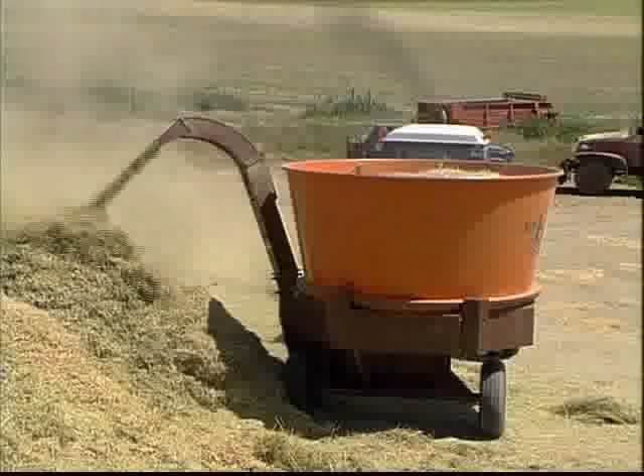We all know that wasted feed means higher cost and lower profit, a situation that's tough to take in today's highly competitive business environment. So work smarter, not harder, and eliminate feed waste with a RotoGrind tub grinder from Burrows Enterprises. RotoGrind tub grinders are the most versatile on the market, yet they are less expensive and easier to use than the grinders out there for your consideration.

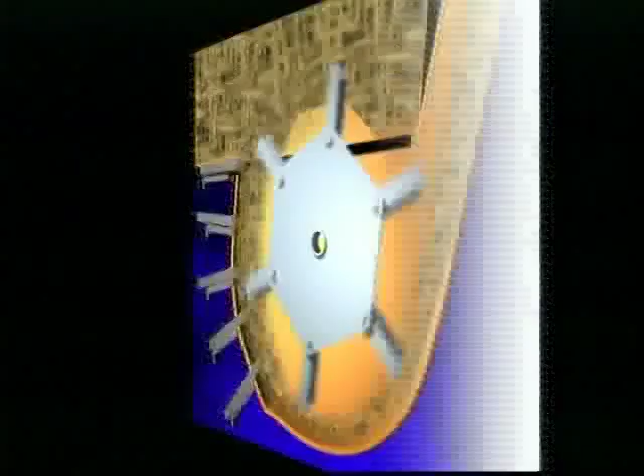RotoGrind's unique state-of-the-art grinding technology means that very few moving parts are required. In fact, the RotoGrind has no belt, no chain, and no gearbox drives to wear out and replace. The rotor cuts across the tub floor from the outside to the center.

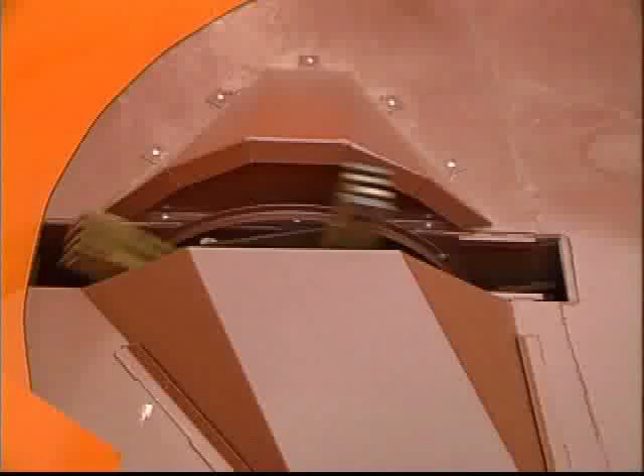In comparison with the competition, RotoGrind's hammer mill is actually 3 to 5 times heavier per inch of shear length. This superior weighting creates the inertia that makes RotoGrind not only the smoothest running grinder on the market, but also the easiest on tractor power takeoffs. In short, fewer moving parts means less upkeep and less downtime, not to mention a much lower purchase price.

Equally impressive features of the RotoGrind are its low horsepower requirement and its ease of operation. These features translate into surprising capacity. With only 80 to 120 horsepower, 10 to 20 tons per hour can be expected under normal conditions.

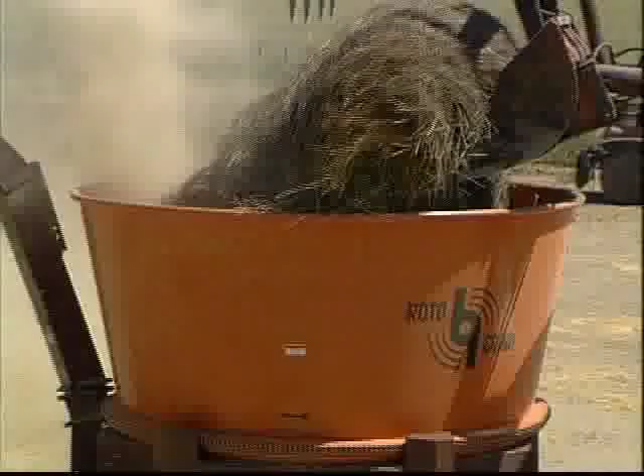The RotoGrind is a durable, versatile grinder that handles all types of forage, as well as ear corn, shelled corn, and small grains. And when Mother Nature puts extra moisture on your forage, RotoGrind enables you to blend inexpensive, lower quality forage into your feeding ration. A smart way to use feeds that would otherwise be thrown away or used for bedding.

Indeed, research stations and university tests have shown that grinding your forage reduces feed waste up to 50%. In addition, feeder cattle can gain up to 1 pound per head per day more when they are fed ground forage instead of unground forage.

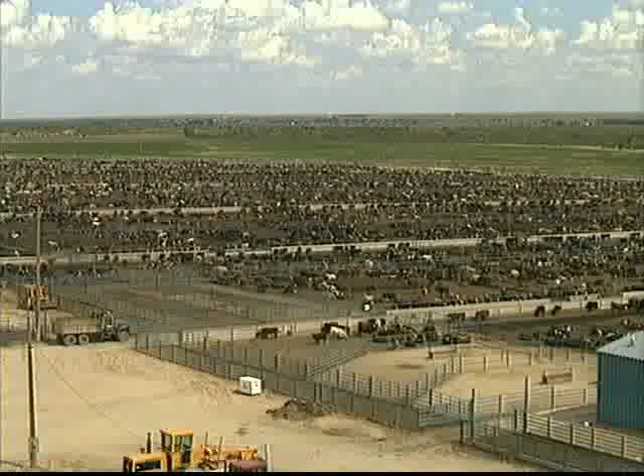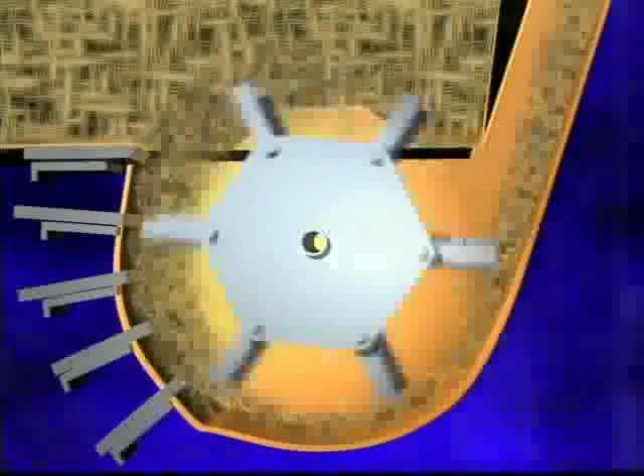Basically a roughage grinder, the RotoGrind handles large round or square bales and loose hay. Unlike less efficient competitors that use screens, the RotoGrind relies on individually adjustable shear plates to control particle size. This exceptional feature easily makes RotoGrind the grinder of choice in tough, wet conditions. These shear plates are controlled from ground level and can be adjusted with ease and speed.

Even debris like leaves and branches or paper and wood chips are no problem with RotoGrind's versatility and durability. You grind at a time that's convenient for you. In addition, our multi-featured tub eliminates the need to grind large stockpiles in advance, and you never have to wait for the custom grinder to arrive.

Fresh ground forage is more palatable to the livestock, and there is obviously less weather loss when you have the flexibility of RotoGrind at your command.

On the RotoGrind, our long, heavy hammers stay extended, even in tough conditions, and extra weight in the mill and hammers creates the flywheel action that reduces shock loads to your tractor's PTO.

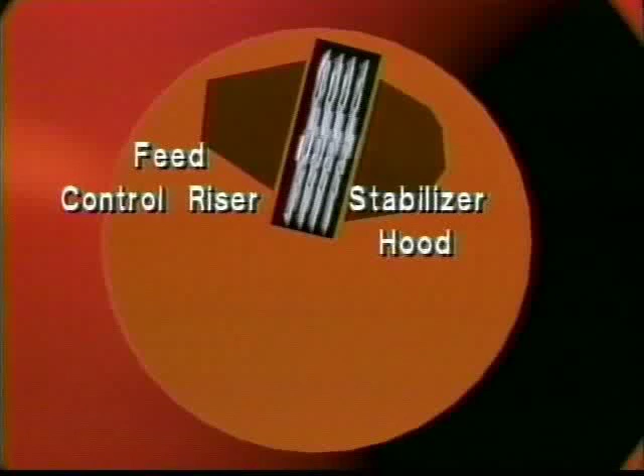The feed control riser determines the depth of bite that the hammers take off the base material, and the stabilizer hood prevents shock loads by ensuring an even rate of feed. Because the hammer mill cuts past the center of the tub, bridging problems are virtually eliminated.

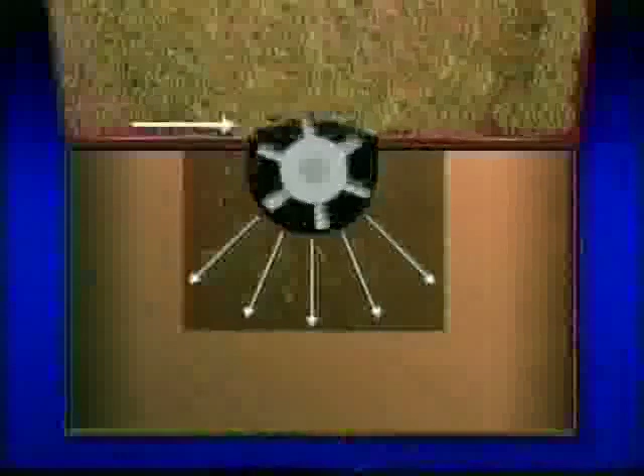Other manufacturers' screen-type grinders commonly use many small and short hammers on a small diameter rotor. In order to reach the tip speed required to grind, they have to increase hammer mill speed to more than 2,000 RPM. This necessary speed is usually generated by a series of belts and sheaves or a gearbox.

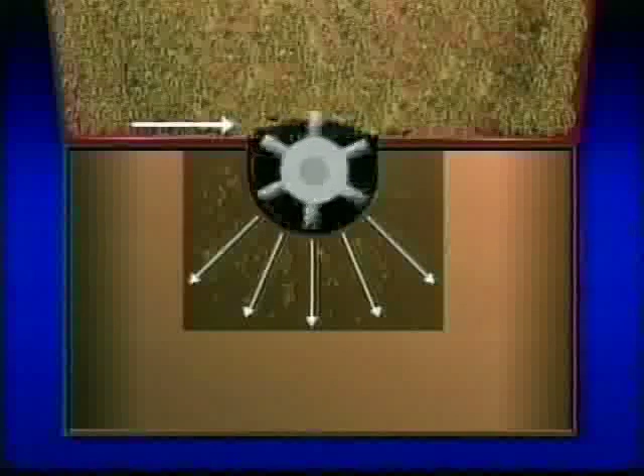To control the size of the grind, these units made by other manufacturers use screens installed next to the hammers. With these machines, material is fed directly into the tips of all the hammers. The amount of bite is uncontrollable and creates severe shock loads to the power source.

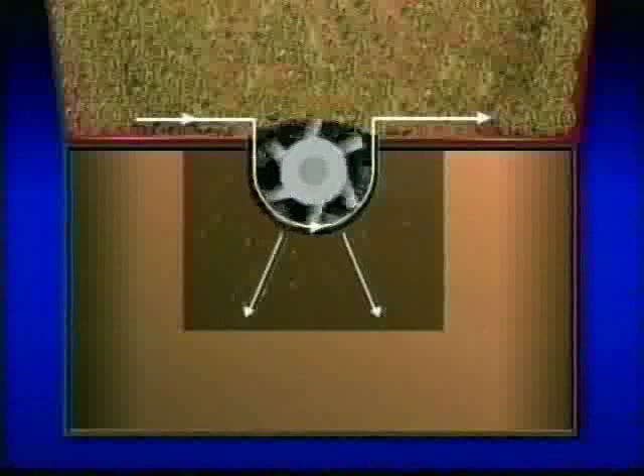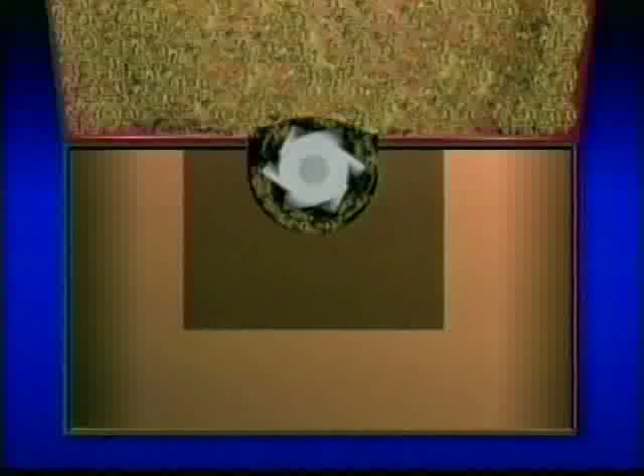When wet material gets in the screen area, it plugs up the screen holes and starts to roll between the mill plates and the screen. It continues to grow in thickness until the rotor locks up solid and imparts tremendous shock to the tractor's PTO components and engine. Some of these competing grinders also have bridging problems because their hammers will not reach the center of the tub floor.

In a particularly important application, grinding dairy quality alfalfa, most grinders hammer the leaves into powder. That's lost protein, drifting away as dust. And stems usually end up being ground too fine because dry alfalfa shatters so easily.

RotoGrind, and RotoGrind alone, can solve this problem by installing heavy-duty alfalfa hammers and driving the machine with the 540 RPM PTO instead of the 1000 RPM PTO that is common. With the slower hammer speed, the grind is coarser and longer. The alfalfa leaves are not powdered, and there is very little dust. Of equal importance, capacity as related to horsepower nearly doubles when grinding speed is reduced from 1000 RPM to 540.

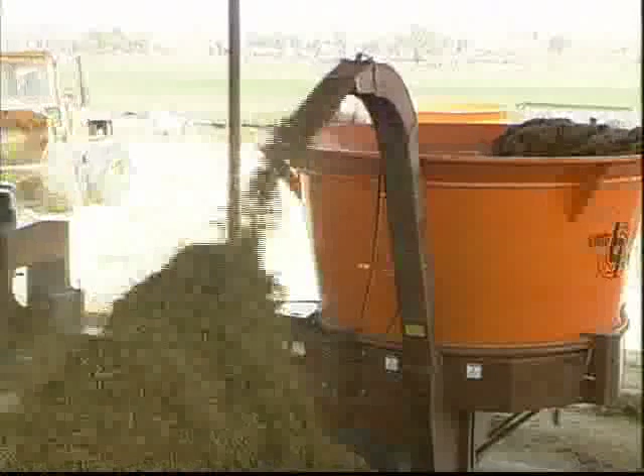The alfalfa hammers also provide an ideal solution for grinding extremely wet and tough materials such as silage bales, wet green waste, compost material, and when spreading bedding.

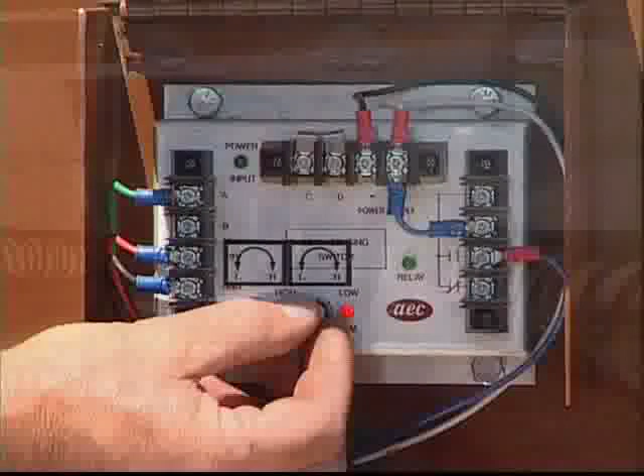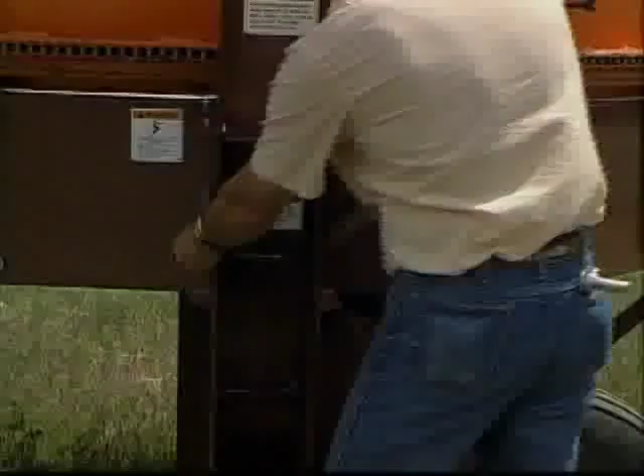A new easily adjustable governor is mounted to the outside of the tub frame for easy access. The new discharge design has a hinged plate that can totally eliminate the problem of plugging the spout with wet materials of up to 75% moisture.

Finally, with our special feed riser adjustments, hammer configurations, and 540 RPM capability, the RotoGrind can easily and quickly be fine-tuned to fit any grinding application.

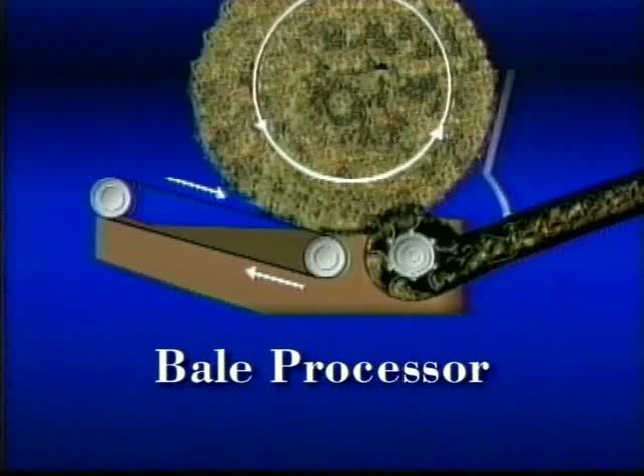Bale processors also fail to generate the tip speed required to do a consistent grinding job on all the materials that may be important to your operation. A bale processor basically does nothing more than what its name says it does. It processes a bale. Its shredding action will not produce a consistent length of material and will not produce a satisfactory grind of coarse roughages or grains.

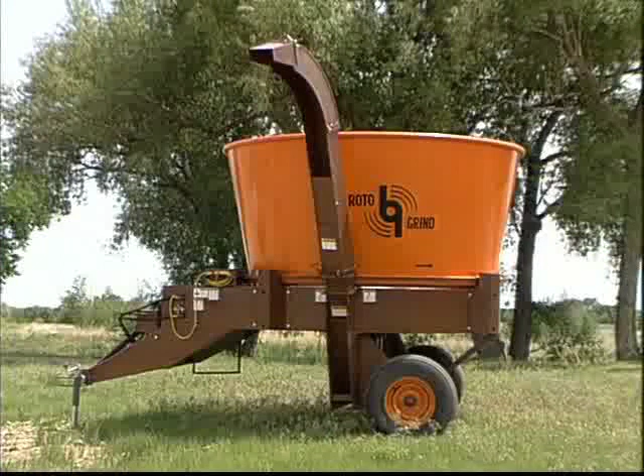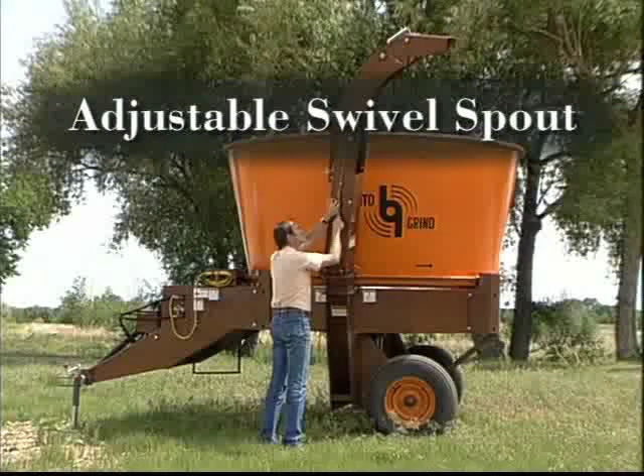So why not go all the way with RotoGrind and get the all-around performance you need to succeed? With your success in mind, RotoGrind offers an array of options that will allow you to meet the special needs of your operation. Optional equipment on the RotoGrind tub grinder includes an adjustable swivel spout, an ear corn shield, an adjustable riser, and a grain hood for small grains.

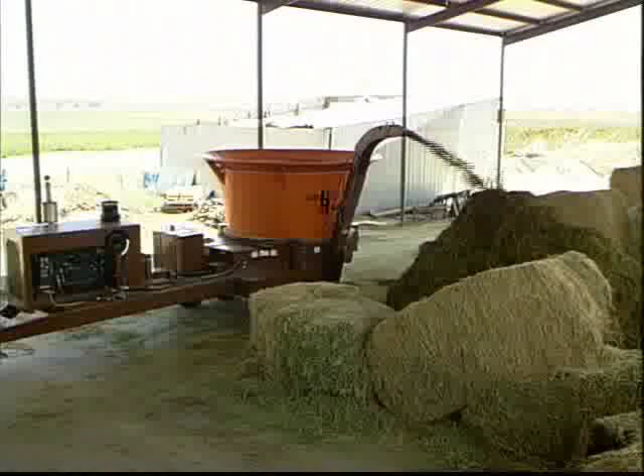RotoGrind units can also be ordered with factory-installed diesel power units or electric motor drives.

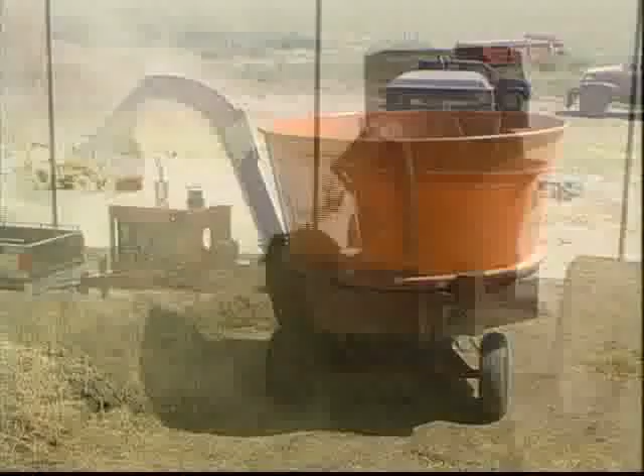In summary, RotoGrind delivers a product designed for the realities of today's agribusiness. Less horsepower, fewer moving parts, smoother operation, and better utilization of feeds. Four very good reasons why you should own a RotoGrind. So arrange for a demonstration now. See for yourself how much money it saves and how well it works in all kinds of conditions. RotoGrind. It's the new, better, and economical concept of grinding.

Burrows Enterprises Incorporated now introduces their latest line of RotoGrind machines. Our new grain grinders have been specially designed to deliver high-capacity output from a low-cost machine.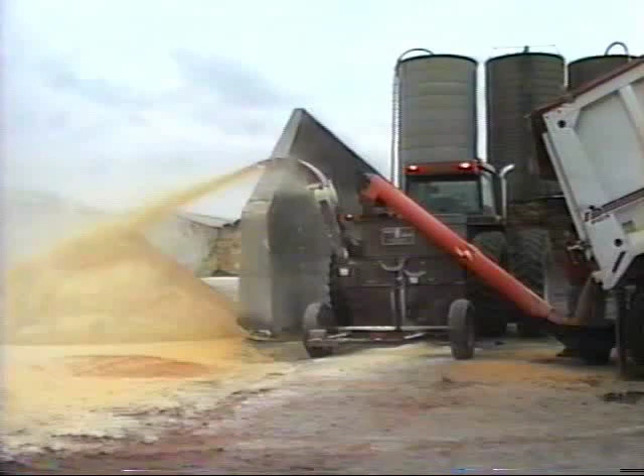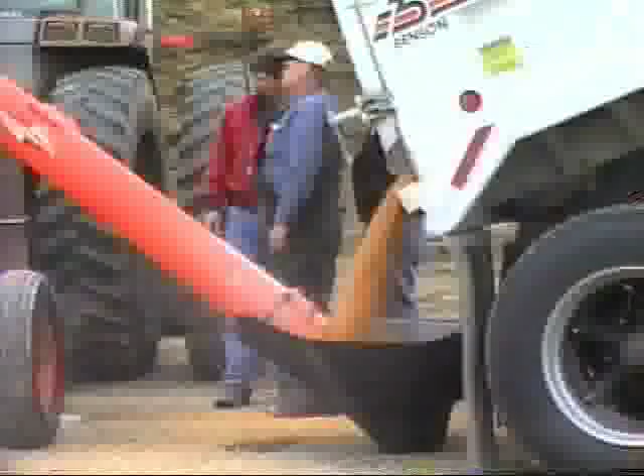Compared to conventional screen-type hammer mills and roller mills, the new RotoGrind grain grinders are much less expensive to purchase, have lower maintenance costs, and offer greater capacity and consistency of product. The RotoGrind grinders handle all types of grains, from shelled corn to millet, in dry or high moisture conditions.

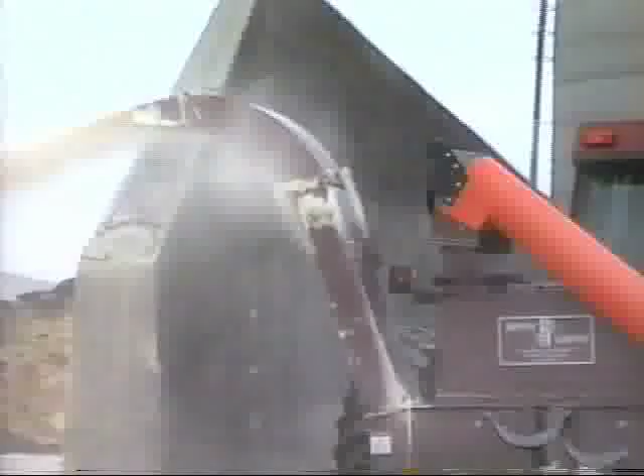You can easily adjust the size of grind required, from a cracked grain at the coarsest setting to nearly flour at the finest setting. University tests show increased milk production when finely ground corn is used in feed rations instead of rolled or cracked corn.

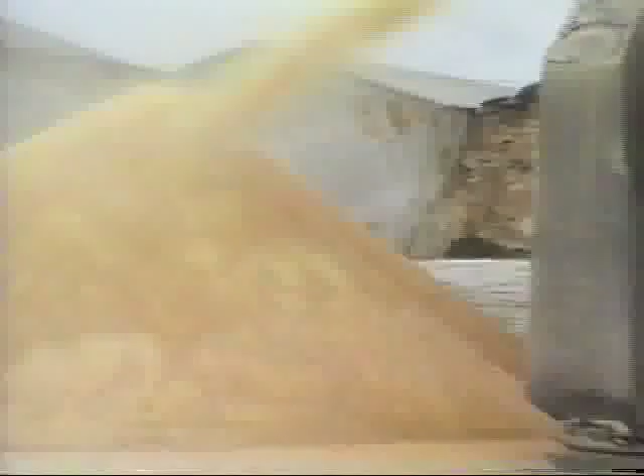Many nutritionists are advising their dairy producers to utilize these benefits and savings of feeding finely ground corn. Our RotoGrind customers have seen milk production increase from 4 to 8 pounds per head per day after they began using these grain grinders. Another great feature is our water valve kit that allows you to inject water into the hammer mill as it is grinding.

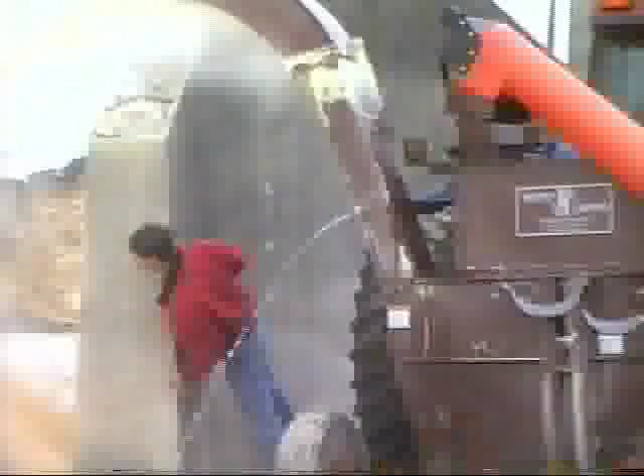This helps to eliminate dust while grinding dry grains and is also helpful when grinding high moisture grains if your conditions dry down too fast. It only takes a small amount of water to cut the dust.

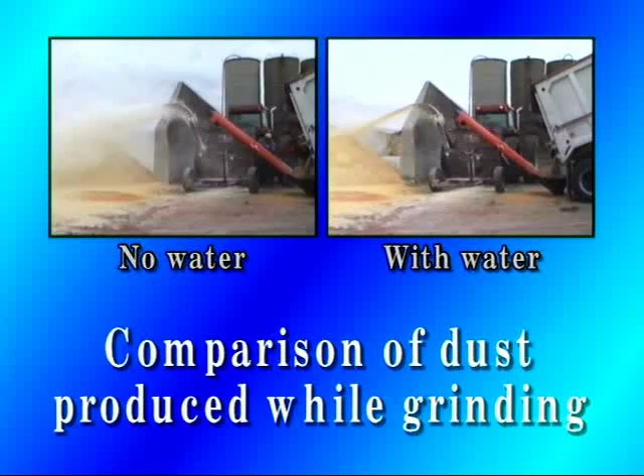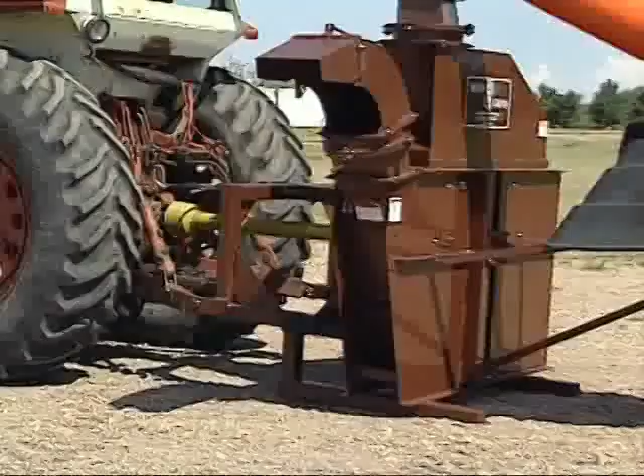RotoGrind has 2 sizes to choose from. Model GG7 is suitable for lower horsepower tractors and can process from 20 to 40 tons per hour. Model GG10 for higher horsepower tractors produces from 35 to over 60 tons per hour. These 2 grinders can be ordered either with a 3-point mount or with the self-loading hydraulic drive auger.

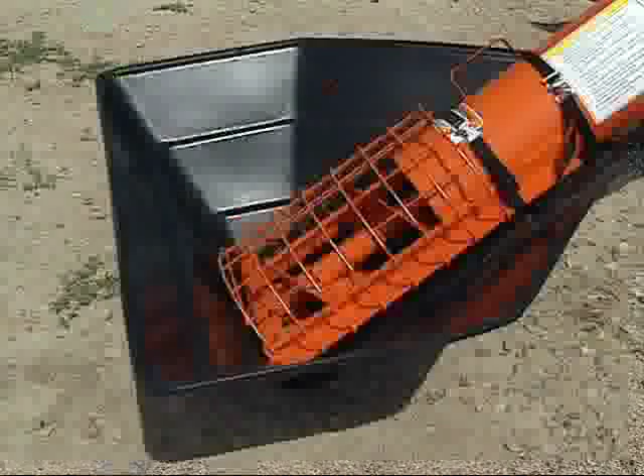Like all RotoGrind products, our grain grinders are user-friendly, meaning easy to operate and adjust, fewer moving parts, and lower cost to maintain. Call us to locate your nearest dealer or to see a demonstration.